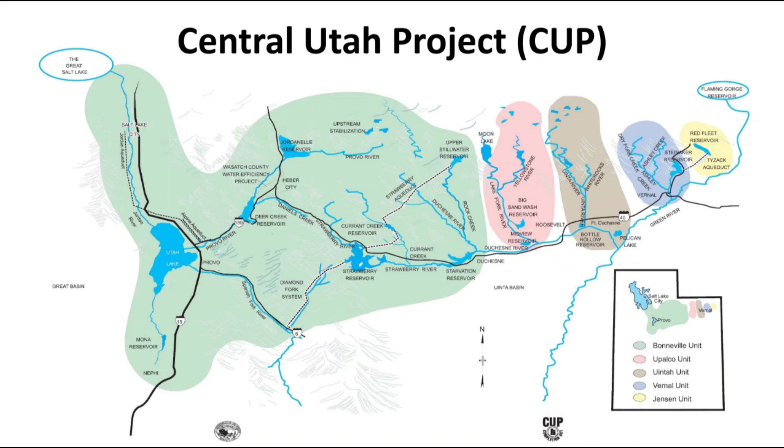Back in 1992, President George H.W. Bush authorized what's called the Central Utah Project Completion Act, or CUPCA, which took the responsibility away from the Bureau of Reclamation to complete the Central Utah Project, or the Bonneville unit, and gave it to the district. So we have a unique role, one of the only agencies in the nation that has federal authority for construction and for other purposes. We still have oversight from the federal government.

We were tasked with completing the Central Utah Project, which is divided into 5 units, some out in the Uinta Basin. The ones on this side that we're interested in are called the municipal and industrial system, which includes the Alpine Aqueduct.

So here's a picture of the Bonneville unit. There's a 37-mile collection system that starts at Upper Stillwater, on the southwestern slopes of the Uinta Mountains, bringing water into Strawberry Reservoir. From Strawberry Reservoir, we can take the water over the divide into Utah County and Wasatch County, or down into the Uinta Basin.

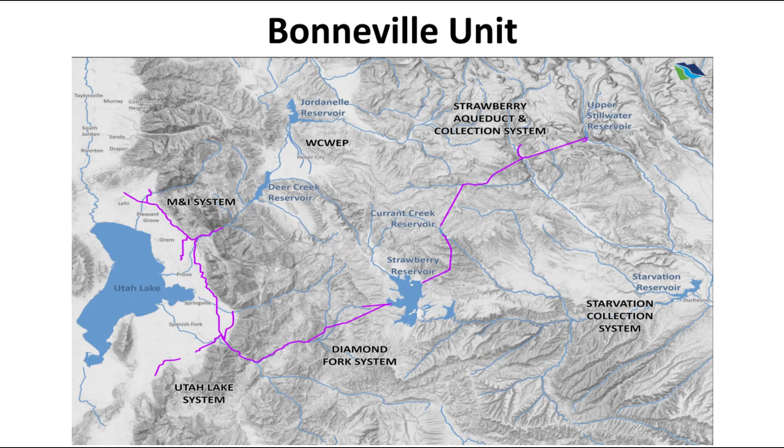You'll notice there's a little bit of an open space here. We just finished this piece of the pipeline, and we're building a piece right down here. As soon as that's done, the major construction on the Central Utah project will be done. It's taken 60 years.

So the M&I system, municipal and industrial system, includes a number of features. Jordanelle Reservoir was constructed, a 314,000 acre-foot reservoir. To put that in perspective, it's more than twice the size of Deer Creek, which was built as part of the Provo River project.

Now the Alpine Aqueduct starts at the mouth of Provo Canyon. We have a 10 million gallon reservoir up there. The Alpine Aqueduct begins there, goes through a tunnel, and then we can deliver water through the aqueduct up into Alpine and North Utah County. There are diversions all along the reach that deliver water to the different cities up through there.

There's also, and this map's not quite accurate, an Alpine Aqueduct Reach 2, which is finished water that brings water into Orem. There's also one that goes into Provo.

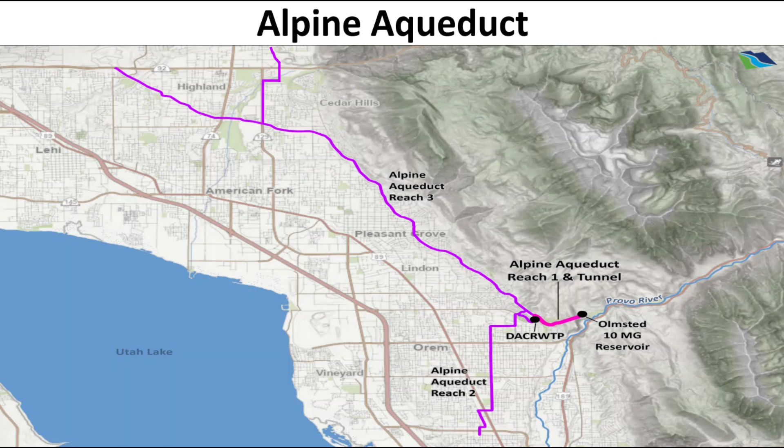A lot of you probably remember the old green snake pipeline that went down Provo Canyon, and this Alpine Aqueduct is a continuation of that pipeline. That pipeline was buried. Cort was the project manager that oversaw the reconstruction of that pipeline from 2001 to 2004. The pipeline that was precariously up there on the hillside with landslides was then buried and put underground, still in pretty much the same alignment. But that Olmsted pipeline is what feeds the Alpine Aqueduct system.

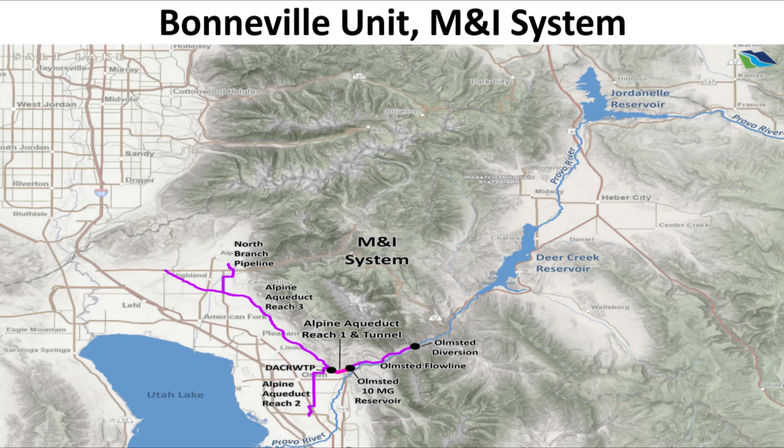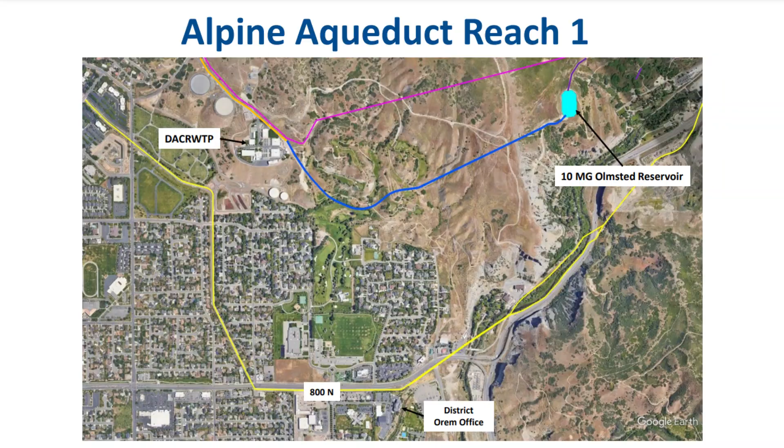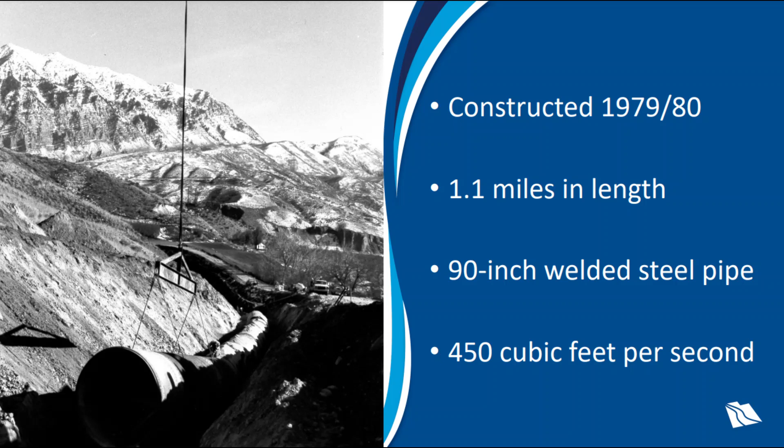So the Alpine Aqueduct Reach 1 was constructed in 1979 and 1980 by the Bureau of Reclamation. It's about 1.1 miles in length, 90-inch welded steel pipe, flowing about 450 cubic feet per second. It includes an 1,830-foot long tunnel section through the hill, and then there's a 400-foot above ground section. It's actually 91 inches in diameter.

This is the piece you can see if you're coming on University Avenue, heading north towards Mount Timpanogos. You can see the pipe up there.

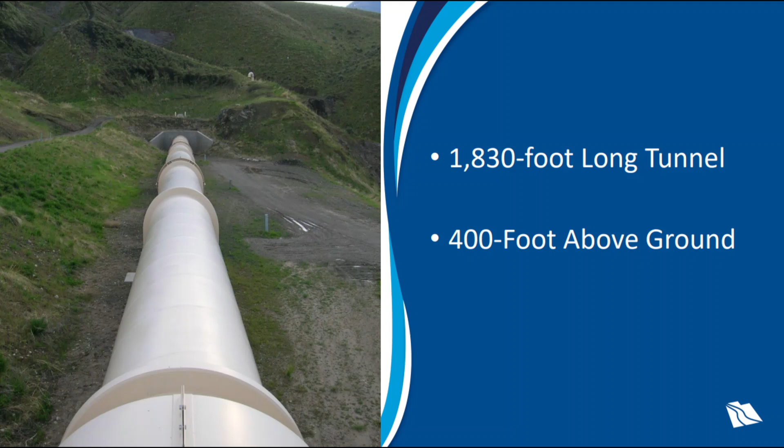The reason Alpine Aqueduct is so important, especially Alpine Aqueduct Reach 1, is it supplies water to 1.6 million people through 3 different water treatment plants. One of them is ours, the Don A. Christiansen plant up on the hill, but there are others in Salt Lake Valley that it delivers water to. We took the 2020 census data, overlaid it, and it's all the shaded area that Alpine Aqueduct serves.

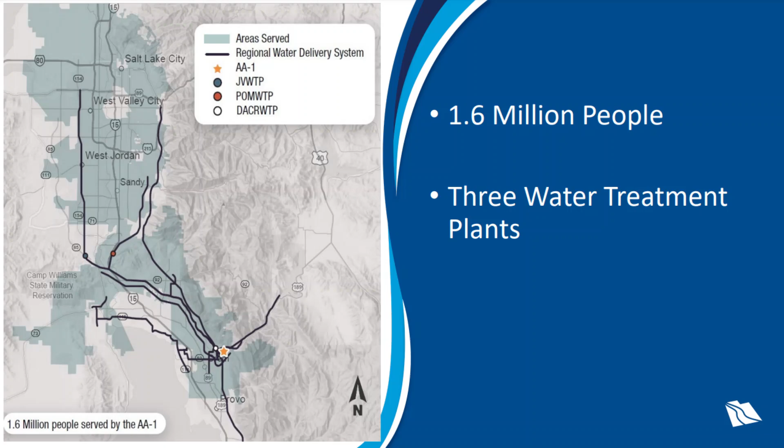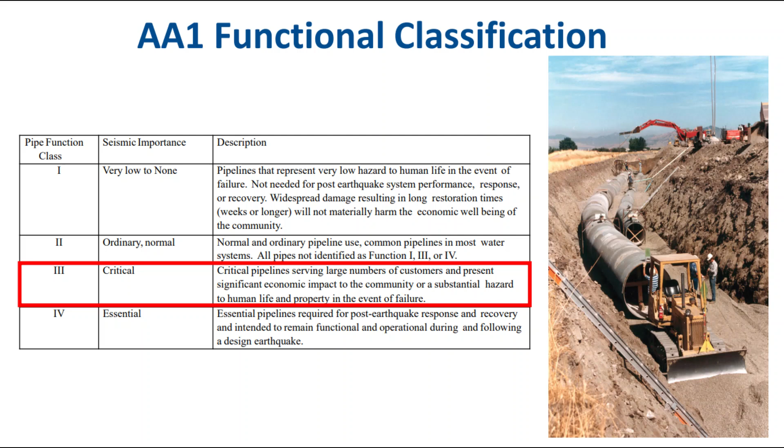American Lifelines Alliance has a rating of just how important your pipelines are, and our Alpine Aqueduct Reach 1 is a class 3, which is critical, and we use that as the standard in our design. We'll talk a little bit about that.

As we started this, we started rating some of the other aqueducts up on the hill. We talked about the Provo River Aqueduct (PRA) and Salt Lake Aqueduct. Ours, the Alpine Aqueduct Reach 1, was by far the most critical as far as non-seismic failure, which is landslide, seismic failure, and then the reliability ranking.

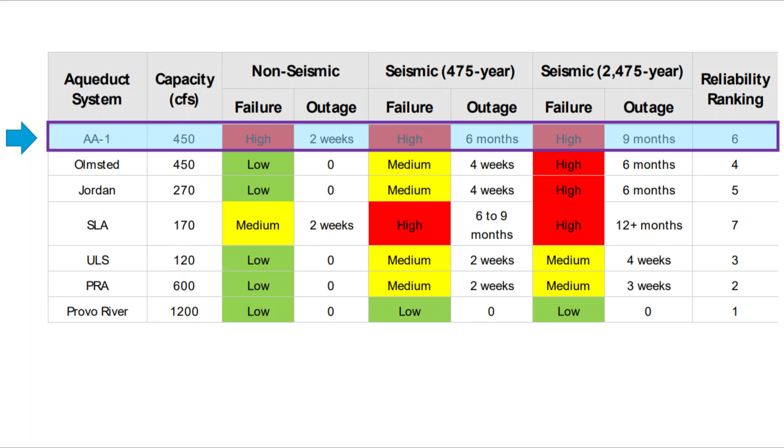So these next slides, I just want to go over what is happening along 800 North at the mouth of Provo Canyon. You may not realize when you're driving up there—our offices are right there.

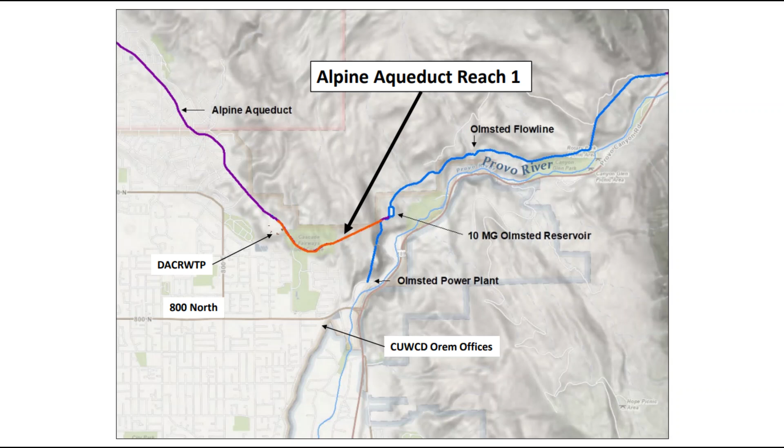A lot of pipelines and things in the road up there. I have a friend at UDOT—we were building one of our pipelines and he's like, why don't you guys just close 800 North down and do all your work instead of closing it down every other year? But so Alpine Aqueduct Reach 1 is that orange line, and the purple line that goes up, and then Mike talked about the Olmsted Flowline, which was the old green—we call it the green snake. I grew up in Orem, and I remember that pipe up there.

So Alpine Aqueduct connects to the Jordan Aqueduct, which flows about 270 CFS, and that one goes all the way into Salt Lake County and is operated and maintained by Jordan Valley Water Conservancy District. It's a sister aqueduct to Alpine Aqueduct, but it starts at the treatment plant and has a connection to Alpine Aqueduct Reach 1, that orange line. It's built in the same corridor as our aqueduct out from the treatment plant northward.

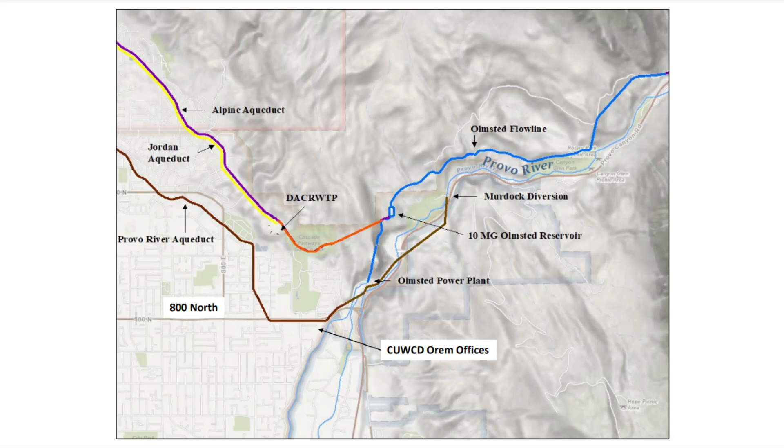The Provo River Aqueduct is the brown line there, and everybody knows it was recently piped 10 years ago, back in 2011 and 12. It's a large diameter, 120-inch pipe right through here. It flows 620 CFS and is operated by Provo River Water Users Association. It does not operate in the winter—it's just a summertime facility, and it has no connection to the Don A. Christiansen treatment plant.

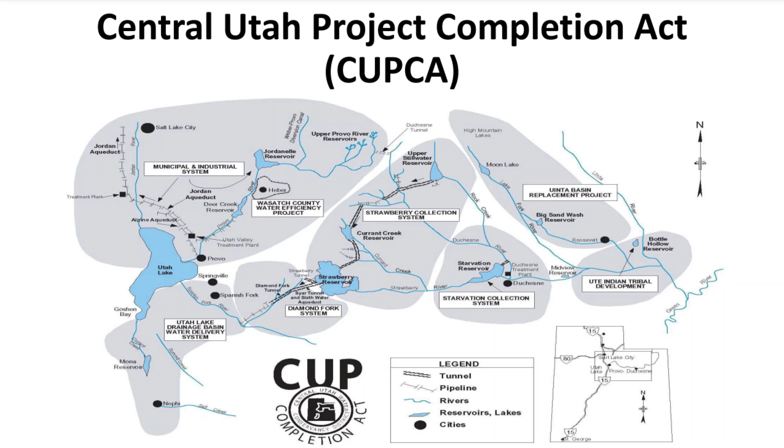So I refer to this as the spaghetti bowl. When you guys drive by on 800 North, there's a lot going on, and it's not just important for Orem, it's important for Provo.

Do we like Provo here? Yeah, okay. But North Utah County, I live in Lehi, and in Salt Lake.

So Alpine Aqueduct Reach 1, since it was built, and I've been in the district 13 years. Cort will tell some stories about some of the failures.

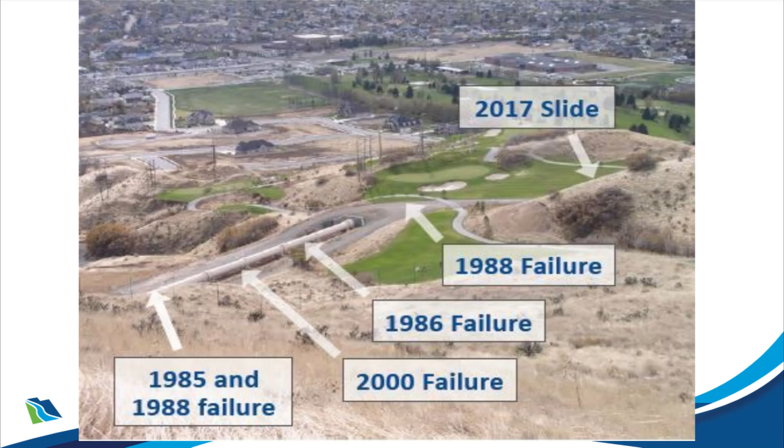When we talk about failures, it's a break or something's happened where we have to take the aqueduct offline, assess what's happened, go in and fix it. Some failures happened through the 80s, and this 2000 failure was the day after Thanksgiving. They always seem to happen on a weekend or a holiday. The straw that broke the camel's back, in a way, was the 2017 slide, and I'll talk a bit about that.

When you say failure, what do you mean? Well, it's not like a big dynamic explosion. It's a landslide or something that came on top of the pipe that we were worried about. That piece of pipe you can see there, the above-ground section, was replaced in 2001. Prior to that, the pipe was buried there, and that whole area is an active landslide zone. The landslide had moved enough that it caused some of the welds to split, not catastrophically, but enough to cause a leak.

Several of those leaks occurred and had to be repaired. Because we knew it was an active landslide, we unburied the pipe and put it on Teflon pads, so as the landslide moved, it would slide underneath the pipe and not take the pipe with it. That's what you're seeing there. So we tried to address it. All those failures, other than 2017, were prior to us bringing the pipe above ground.

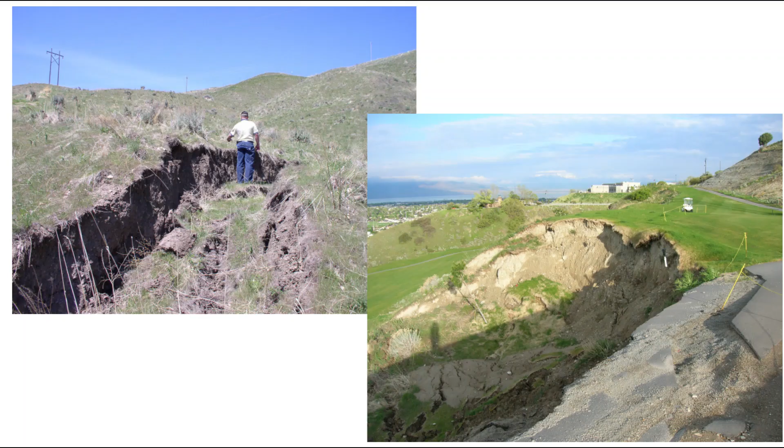Note the golf course there, it's number 12 green. Just some pictures of some of the landslides. I think this is from 2000, Thanksgiving. You can see the people up there, just to show how big it is. There's Cort standing on the landslide, and you can see the scarp. The one on the right, again, is the golf course area.

Are you pretty close to some fault lines right there? We'll talk about that in just a sec.

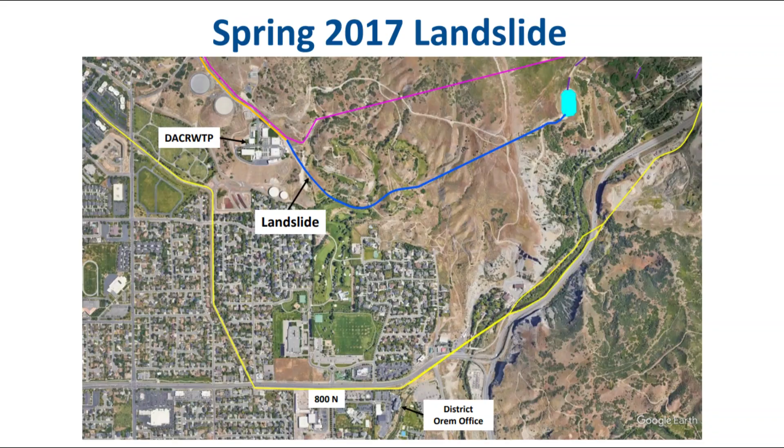The 2017 landslide happened just to the south and east of the treatment plant. What happened was our O&M guys went out April 1st, 2017. If you remember, it was a pretty good water year. They started to notice these ridges or ripples in the fairway. The blue line there is the aqueduct, Alpine Aqueduct Reach 1.

I like this picture because you see it and think, oh yeah, that's the landslide. But if you look, there's the scarp clear up there, and it's coming right onto the pipe. What was happening is it was squishing the pipe and taking it out around it. It worried us. Well, it worried us a lot.

Casey Shaw took the lead, and what we did was load the toe. We were building the Olmsted Power Plant at the time, and we had a whole bunch of fill material, so we loaded it against the toe of the slide to stop the landslide.

We also modeled what would happen if there was a catastrophic failure, at 450 CFS. It's not like you can just shut the valve off in a minute, it takes about 30 to 45 minutes, up to an hour to shut it off. So we wanted to know what would happen if this thing just broke. I counted up the homes, and it was close to a couple hundred. Multiple schools and businesses would have had at least a foot of water.

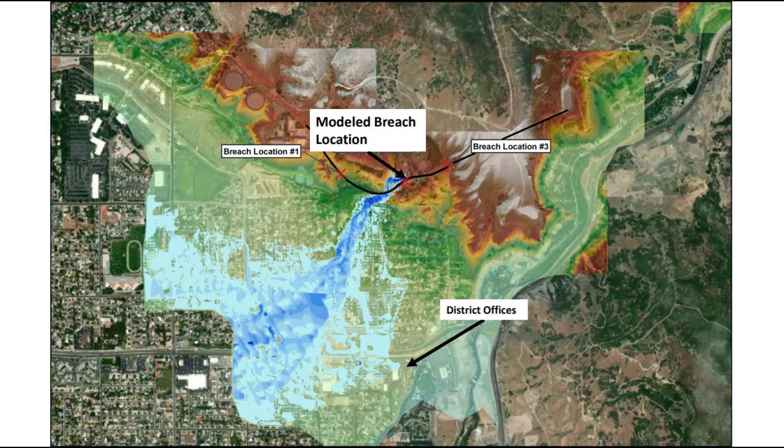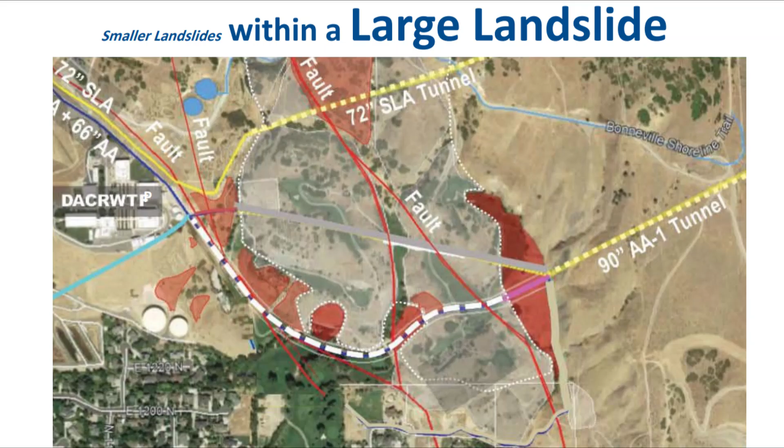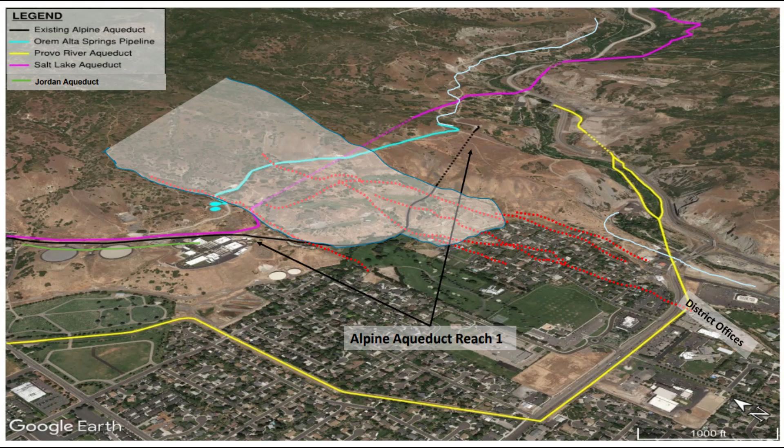Provo Canyon is kind of a break point between the southern reach of the Wasatch Fault and the central reach, and they come together at an oblique angle. The southern reach actually steps to the east into Provo Canyon - it used to be the old Squaw Peak, now renamed, but that step that formed Squaw Peak is where the fault runs down through. So the fault steps east there, and it all converges in Provo Canyon.

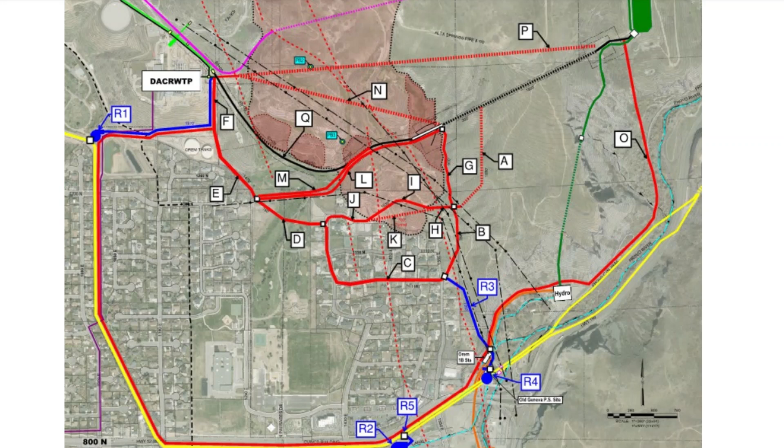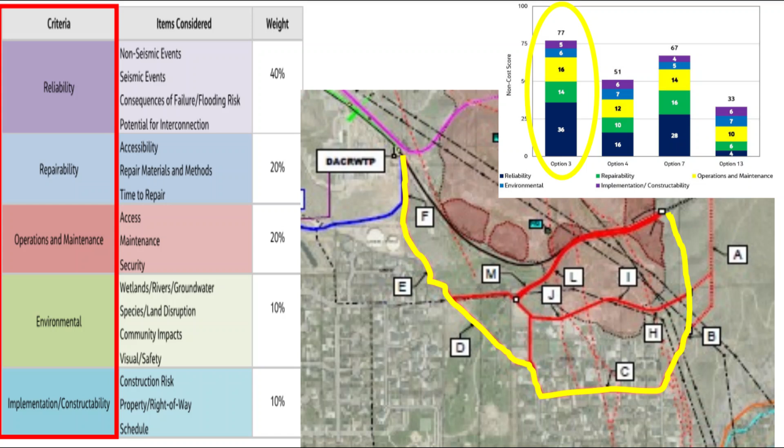As part of our study, we wanted to look at alignments for how to fix the problem. We came up with 15 different ones. We looked at tunneling, going over the landslide, and going around the landslide. This is what we ended up with, that yellow line - we wanted to go around the landslide. That solves that issue, but it does not solve everything. We still have to cross the faults. Regardless of what we do, we have a fault issue.

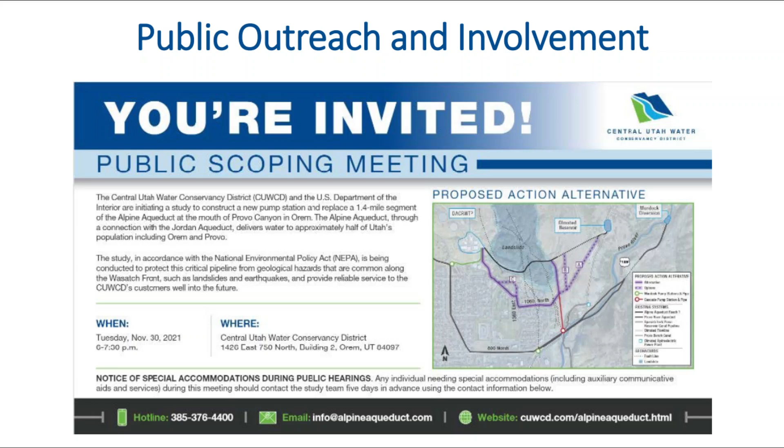If you remember, back on a previous slide it talked about the American Lifelines Alliance. They said for this type of pipeline, you need to design for a 975-year event on the Wasatch Fault. So that came into play. We did NEPA and finished it about a year and a half ago. We reached out to people in the neighborhood, and went as far over as 800, but didn't get a lot of turnout or interest. We finished it November of 2022.

So there's our alignment. What I wanted to show is that yes, we can get out and around the landslide, but we still cross two splays of the Wasatch Fault.

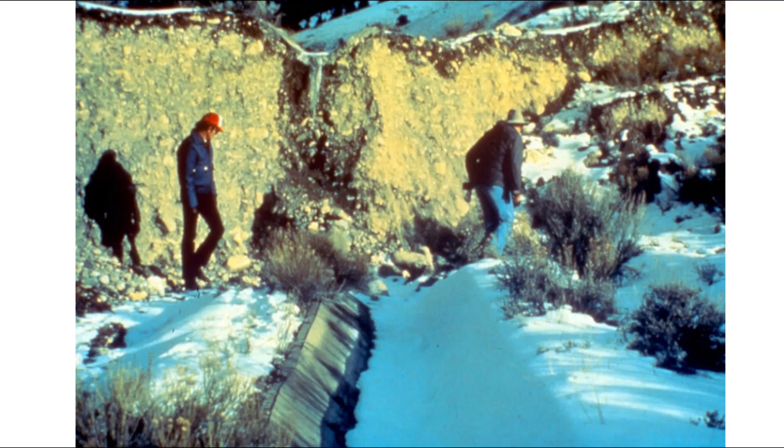This is a picture of an earthquake in 1983, October 28th I believe, in Idaho - one of the largest, I think the largest one. This is what we're trying to avoid. You can see the slip that's happened there. These two guys are trying to figure out how they're going to get water now that their ditch is 12 feet off, and it's not just vertical, it looks like it's shifted depending on the angle here. And that's what we're concerned with.

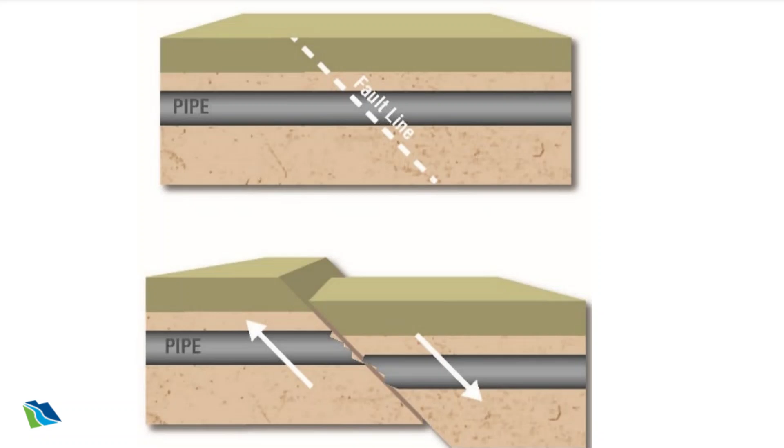It's a very simple graph here, it just shows how we're going to mitigate that. So part of what we did was also identify the uncertainty zones, we'll call them, with the Wasatch Fault through our project.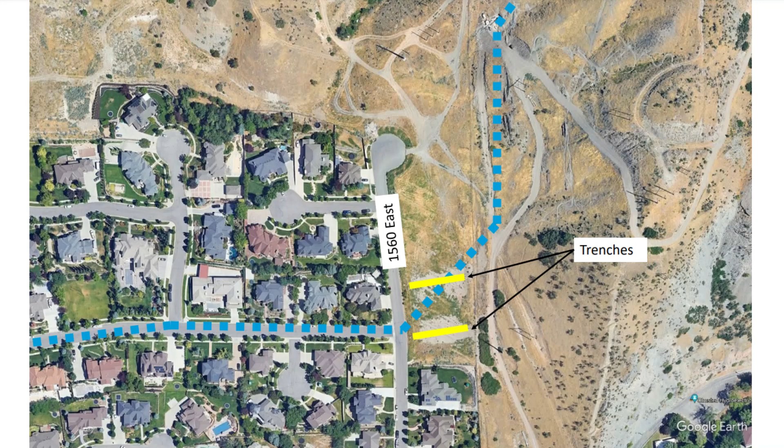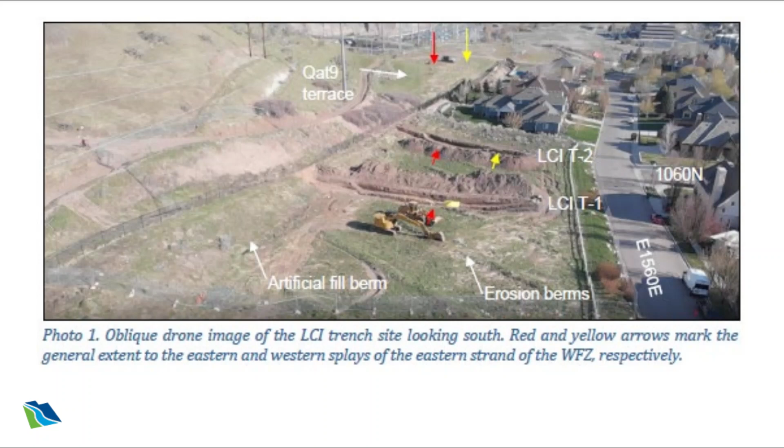The dashed line is our alignment. We dug 2 trenches, and this is a drone view looking south of the trenches. Can anybody point out the Wasatch Fault there? Did anybody come out? Sam Kelly came out, yeah, and some of your firemen and a few others. We had a council member too, I think Lene came out and saw it.

Our consultant out of San Francisco had been working on a project in Costa Rica - they're all over the world, and they said this is the best definition of a fault they have seen in a very long time, if ever. So you can see what's happening there. When I was out there, these guys from LCI said it's dipping this way - you see that building with the flagpole over there? I said yeah, that's our offices. He goes, that's where it's headed. He didn't know that our offices were over there.

Some more pictures of the fault. This is looking north.

You're looking at the primary fault, and some of the deposits that happen after. Just another picture of it.

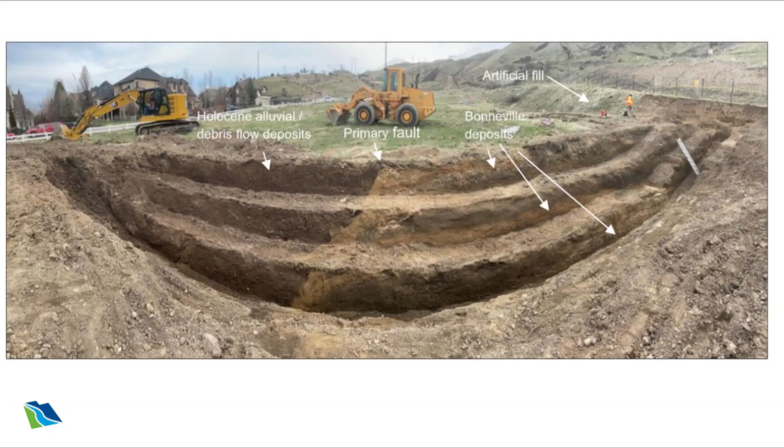What they do is put these little pins up everywhere to see the different deposits. What we're trying to figure out is for a 1,000-year event, how much this is going to slip. If the earthquake happened there today, how far down and out is it going to go? So they'll take a piece of PVC, pound it into the wall, cut it, and carbon date it, and they can tell this one's got the same time as this one over here.

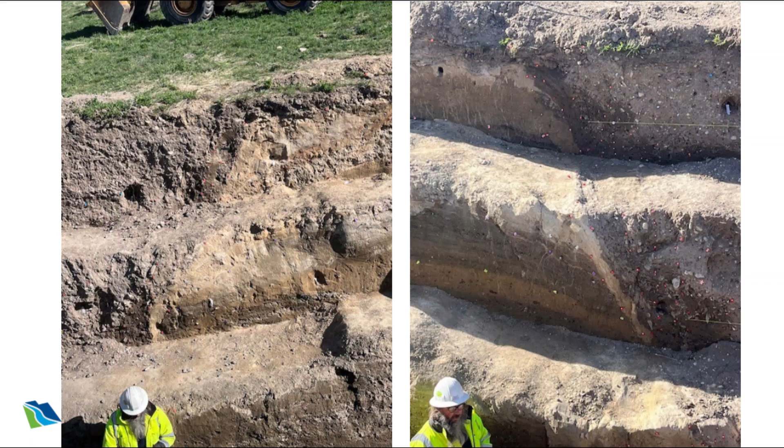It's slipping about 12, almost 13 feet. There's a picture of the trench to the south. You can see the two different types of soils there and the fault.

So that was the eastern strand. That's on property off 1560 East, owned by Todd Peterson. I think there's some building lots there that he's not able to build homes on.

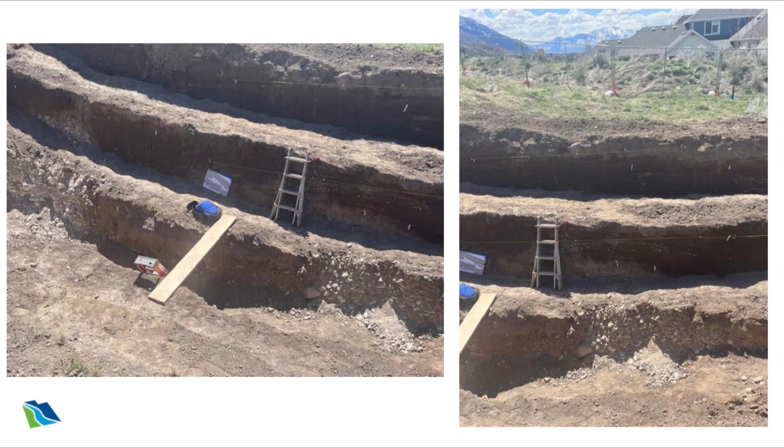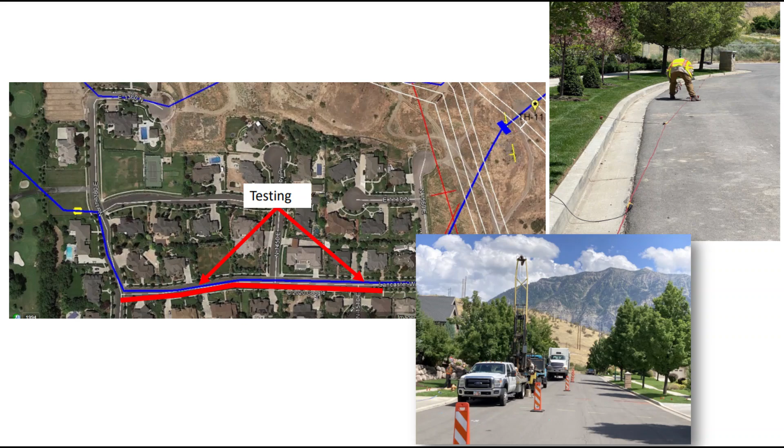But then we also did some work on the central strand, down at 1060 North. We wanted to know a little bit more, so we did some studying. We did some CPT, cone penetration testing, which means driving a cone down into the ground, and it measures resistance and some other properties, so that we can narrow down this fault zone.

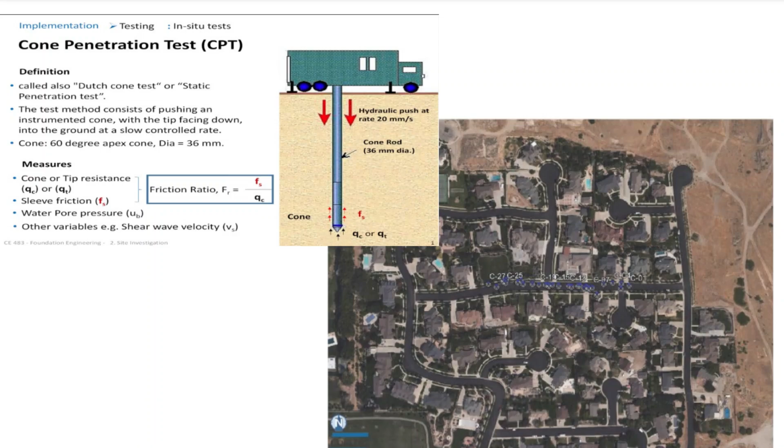And this is important. So before, for this central strand, we had about 525 feet, and we were able to, through our testing, narrow it down to 185 feet.

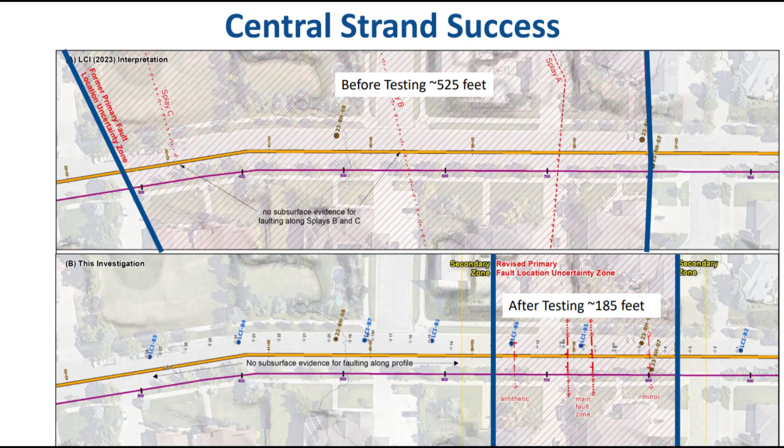That's important because the type of pipe we're talking about going across the fault is specialized. It's called a hazard-resistant ductile iron pipe, and it's $11,000 a foot for this pipe. So we spent about $100,000 to do this testing, saving over $1 million.

So this is some pictures of the hazard-resistant ductile iron pipe. This is a project that happened in Southern California 2 years ago, with the Metropolitan Water District of Southern California. We met with these people.

This is a 104-inch pipe, the largest they make. It's made by Kubota, same people that make tractors, but they make pipe. It's made in Japan.

You can see these joints expand out and rotate, so if the ground shifts out from underneath it... I don't think I have a picture of it, but they studied this and showed in tests that this pipe will survive an earthquake. It'll pop out and fall down. It's kind of cool. Just some more pictures of them with their installation.

This is what we plan on doing when we cross our two fault zones.

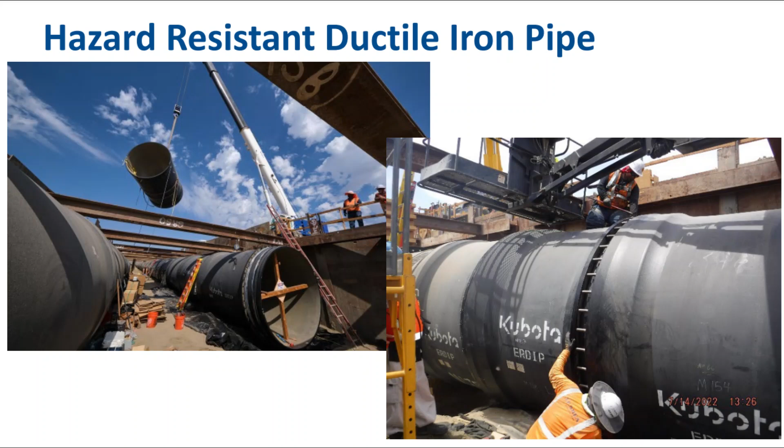Where will this be manufactured? Japan. And then it comes across on a boat, I guess. It's about a 9-month lead time on this pipe. That sounds pretty good, 9 months. Some months a year, but yeah, some of our electrical components are worse. Yeah, electric, it's crazy.

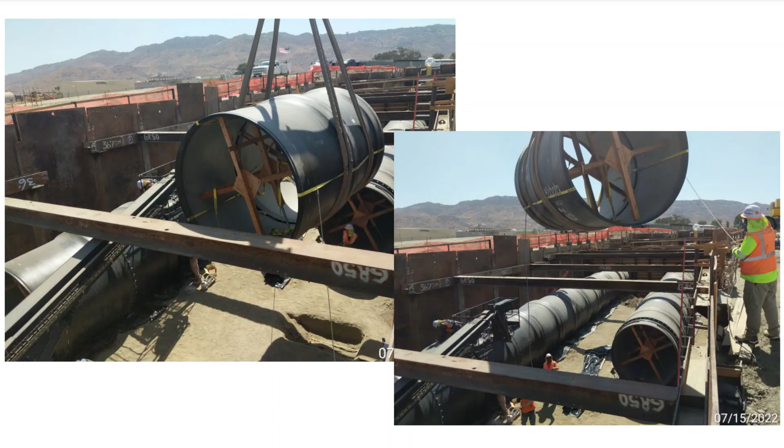There's some more construction pictures.

So that pipe comes in 7-foot long joints, so think of it like a centipede. It's jointed, and as the fault slips, each joint is just going to slip a little bit, and that will eventually give us the 12 feet of displacement that we're looking for.

How many feet of that pipe are you installing, like 600 or 700? Yeah, it's all total about 600-700 feet. It's $7 million of the project, about 10% of the overall project. Outside of the fault zones, the pipe will be welded steel pipe.

We don't have any of that, do we, Quinn? You want some? No, what's the price? $11,100 last I heard, per foot.

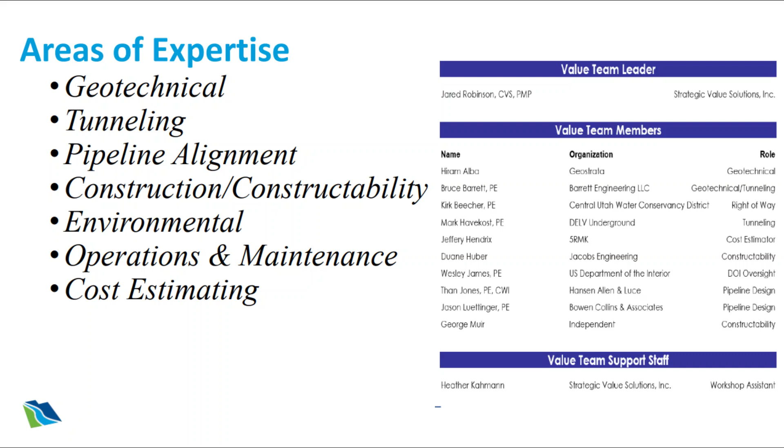We did a value engineering exercise back in January. We looked at the pipe, the alignment, and came up with some recommendations.

So where we're at today is we're at a 60% design. We had our review meeting on Friday with the consultant and the group. We are meeting tomorrow with Taggart and others from Orem City to go over the city's comments, and we'll be involved with the city quite a bit on this project.

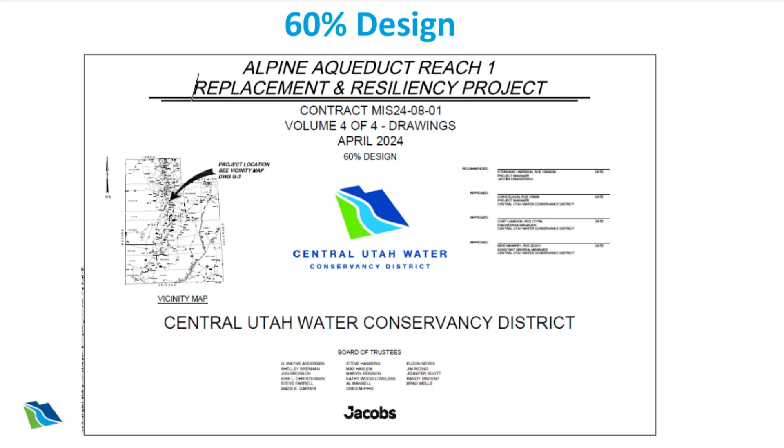This is just a map showing the alignment. I probably failed to mention that it's a 108-inch diameter pipe, so we're going from 90-inch to 108-inch, except through those fault zones where it will be 104-inch, the largest they make in that specialized pipe. We had to upsize the pipe because we're making it longer, and we have to overcome more head.

Is it going to be above ground in those areas? It's completely buried, all buried pipeline. It'll be shallow in those areas. You don't want a lot of weight on top of that pipe if the earthquake goes off, as it sticks out of the ground.

Chris, are you going to talk about right-of-way and some of the impacts to property owners and residents? Yeah, let's go back to this slide. So you can see here we really are dealing with a couple of property owners. The big one is Todd Pedersen. We've been working with him for about a year and a half, almost two years in August.

The reason this is hatched up here is because that's where the existing pipeline is. So we'll abandon that, remove the above ground portion, and the federal government has agreed to release the easement. But we need a new easement down below, through what I call the former golf course area. So we're still working with him.

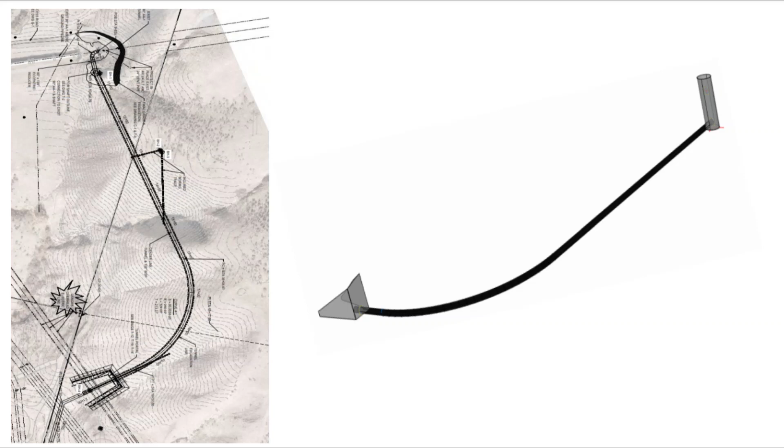For Orem City, we have a meter vault where we'll involve all of you, because this is going to be the turnout here for the golf course for Todd Pedersen. That's by your tanks over there, kind of by the cemetery. It's just a picture of that, and then a schedule.

We're at 60%. We're hoping we can secure the right of way and award construction later this fall—August is the goal. On Todd Pedersen's property, you're looking at obtaining easements then. Yes, correct, we will.

Yeah, and this was my... we call it the basketball corridor because we had Ryan Smith just right there, and Coach Pope is down there as well, and then Todd with Vivint. It's like, who else could we impact? Your former mayor, when we presented this, I think Mike did the presentation, he said 'You guys couldn't have picked a worse neighborhood to go through.' Or maybe not worse, more like challenging, I think is what he said. And I'm like, well, I feel like the corridor picked us.

This was about it. We looked at 15 different alternatives, including going clear down to 800 North. The problem with 800 North is we've got all the other pipelines in there, and the Provo River Aqueduct is a concrete pipe that's gasketed, so in an earthquake it's just going to fall apart. And we didn't want ours near that one.

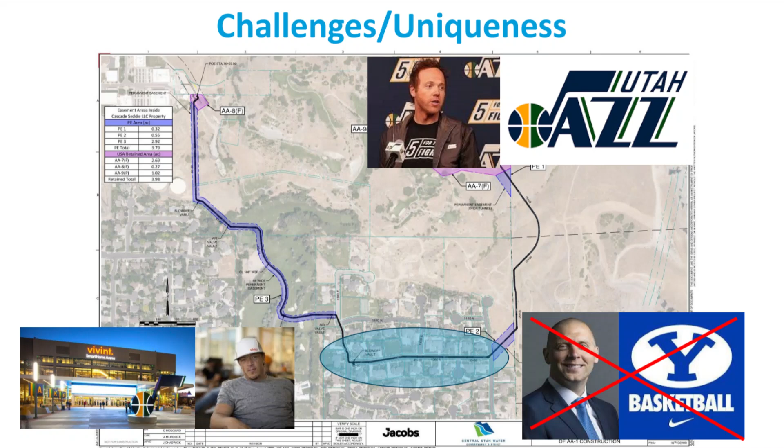One thing I didn't mention with our landslide is that in an earthquake event, under certain conditions, it's going to move at least 10 feet. It's moving now, we have inclinometers up there that measure how much that mass is moving, and it's moving just a little bit. We're monitoring it, but if that thing were like a good water year like last year or even this year, which would lubricate the bedding plane, and there was an earthquake on top of that, it could be a double whammy. With the landslide moving, because nothing's going to hold, at 10 feet, that pipe is just going to be obliterated.

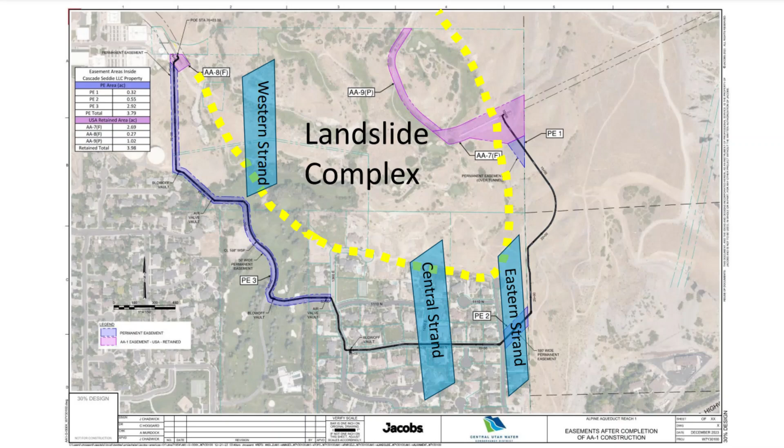So, Chris, how do some of the other pipelines... I remember from some of your earlier slides there was a Salt Lake Aqueduct up there that looked like it was maybe within this landslide zone. Maybe talk about those other ones a little bit. Yeah, they have a lot of the same issues, but they feel like they're in better shape. They're up higher, and they think they're above the landslide, but they do cross the fault, obviously.

They're 69 inch, 170 CFS that goes through it. And the Provo River Aqueduct, there's actually 2 pipes that come out of the canyon. The newer pipe, which I don't know if you guys remember, was built around 2010, 2011, is welded steel pipe, and it's fine. But the old Provo River Aqueduct, which was the Murdock Canal, is this gasketed joint concrete pipe, and it comes up the hill there by Will's Pit Stop or Mama Chu's and all that. We think that in an event that piece will pull apart and could wash out the whole roadway, and that is one reason why we don't want our pipe in 800 North.

So why can't you just tunnel underneath the landslide? Okay, we looked at tunneling, and we would have to drill 150-foot shafts on either side, so it'd be a big belly. To get in to inspect that and to maintain it is... and nearly impossible — you might avoid the landslide, but in an earthquake it's nearly impossible to repair. We would be able to repair it, but you still have the fault crossing. That's a good point — you probably didn't have any volunteers to go down and inspect it then either.

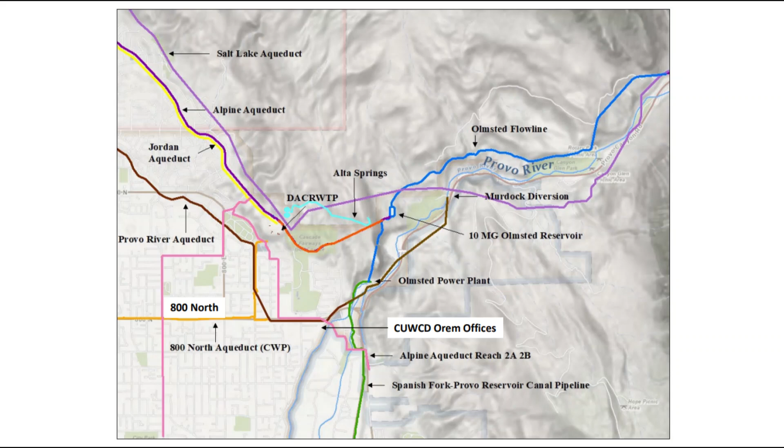Are there any questions? Reed has this presentation, I've got a hard copy you can have. Reed also has my contact info if you have any questions. We'll keep the city appraised as we keep moving down the path of design and into construction. Central's been very good on communicating with us, and your PR group is with Horrocks. It's Horrocks, okay, they're really good, they've done a great job.

I know they've had several open houses and public meetings where they've only had a handful of people coming out, which is surprising to me, but they must feel confident in the process and what's occurring. Their street in front of their home is going to be a battle zone, and they won't be able to drive into their driveway during construction.

You're going to have like shuttles? Is that the plan right now, or? Shuttles, we're looking at. I got talking yesterday, give them all Fitbits. We thought about golf carts. This work is going to happen, 90% of it will be between top back of curb. Sidewalk should be okay, we're going to drive on the sidewalk. We're working through some of these as we get closer to narrowing down what to do.

Well, they've done a great job coordinating. He mentioned he's meeting with our city engineer tomorrow and our design group.

Yes, and I know some of the water people will be there because there's some issues with the water line. Water and sewer's a big deal. Sewer's going to have to be relocated altogether, probably have to do a pump bypass on the sewer to be able to build that line. They'll have to relocate the sewer line that goes down that road. So it's a very challenging project, they can do it, but it's going to require a lot of extra effort. How long is the construction project going to take for the people that live on that street?

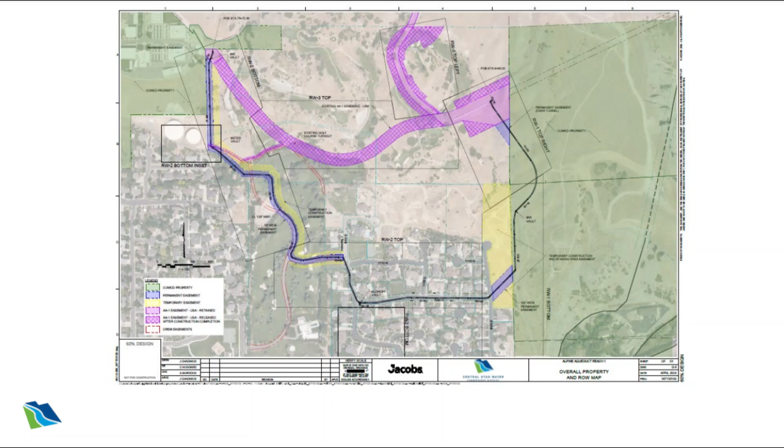Chris, I've got to take off, I've got a flight to catch. I'll leave it in your capable hands. Okay, great. Thanks, Jim.

Thank you, Jim. Any questions? Any other follow-up questions for Chris?